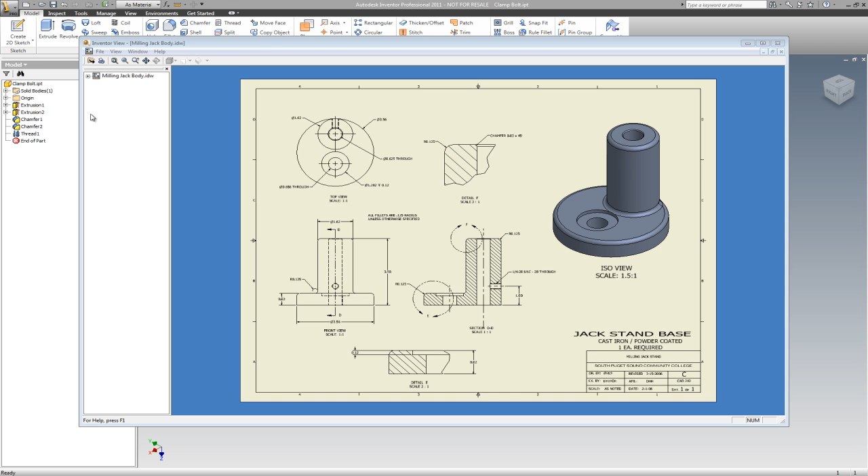Hopefully I have all of my dimensions. Again, as we're going through these, I'm finding that I have not been very diligent with my dimensioning. Here's my last little project that we did, so I'm going to close that out. Go to Projects, confirm that we are in the jack screw assembly. Go to New, Standard. Okay, boy, you can just get whizzing on these, can't you?

So we're going to start with our base. I'm going to go to our center here and find our center, pull that out. I need to go over here. I'm going to just have to drop this out here and come over here. I've got to zoom in my window so I can read my dimensions.

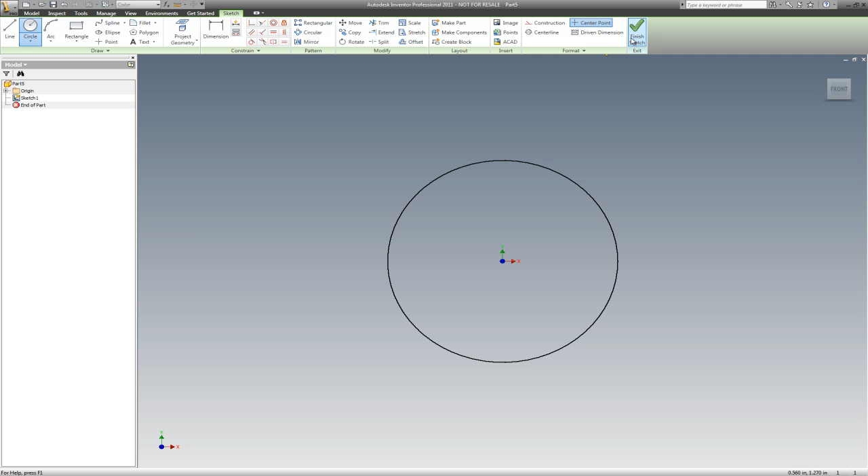Okay, and this dimension is 3.56, and finish sketch, and extrude, and I need to go over here and set a dimension of 0.62.

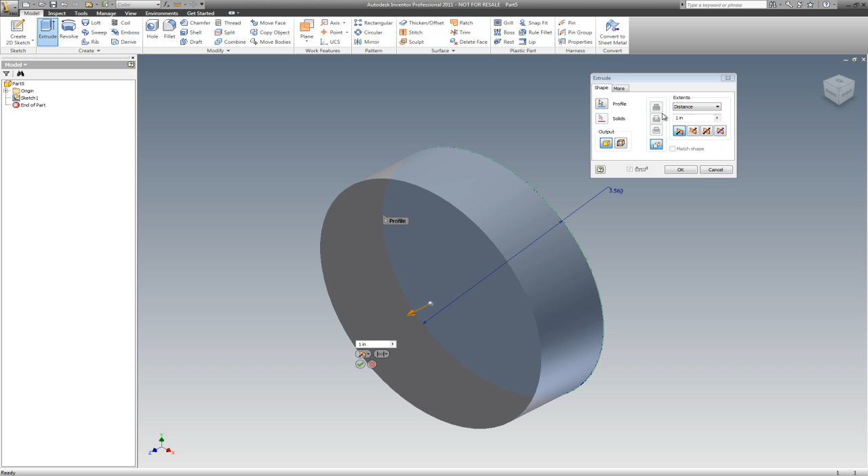I'm going to bring it around front, roll it up, right click, set current view as front, set current view as home, and then I can build off of this.

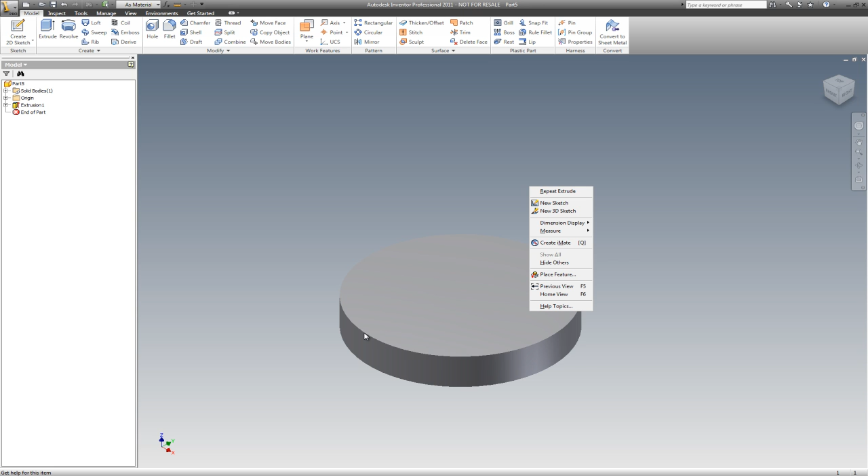We've got several things we need to do with this. I need to do a fillet here, but I don't want to do it until I build the other part, so I'm going to go over here and look and see how this attaches. If we look here, we can see we just created the base and extruded it up. Now we need to create this, and it looks to me like this is tangent with that, so I think that's the next part I will do.

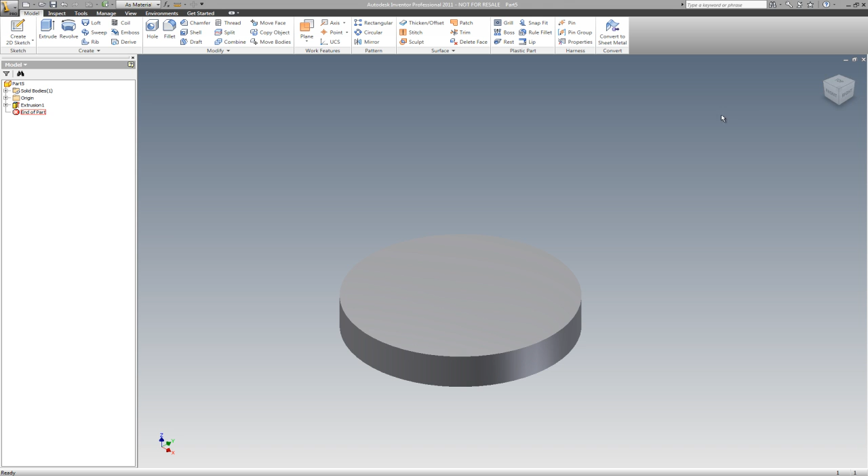So I'm going to go up on top of this. I'll go right click, new sketch, pick that face, draw my circle, just come in here and draw my diameter. My diameter is 1.62, and I'm going to ask it to be tangent from this to that. And the other thing I think I wanted to do is make it perpendicular.

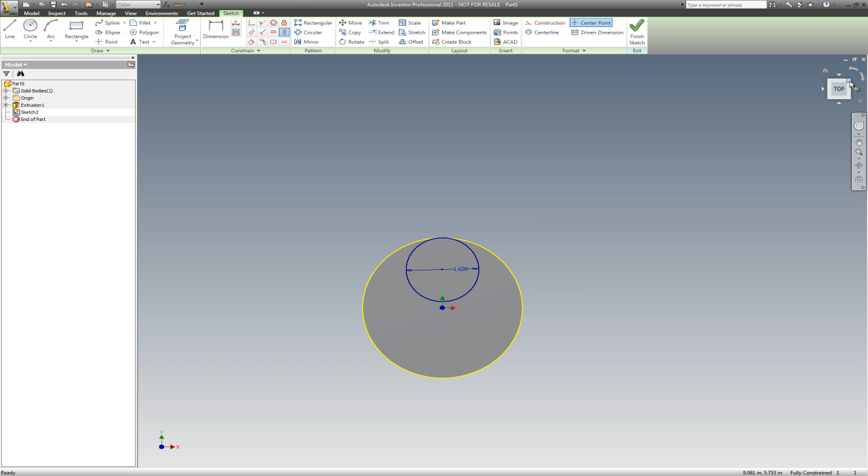Perpendicular from here to here. There we go. So I've made it perpendicular from the center of this circle to the center of that. That's just to help me so it doesn't come back and haunt me later on. Okay, finish sketch, extrude. Let's extrude this out, and it looks like 3.5.

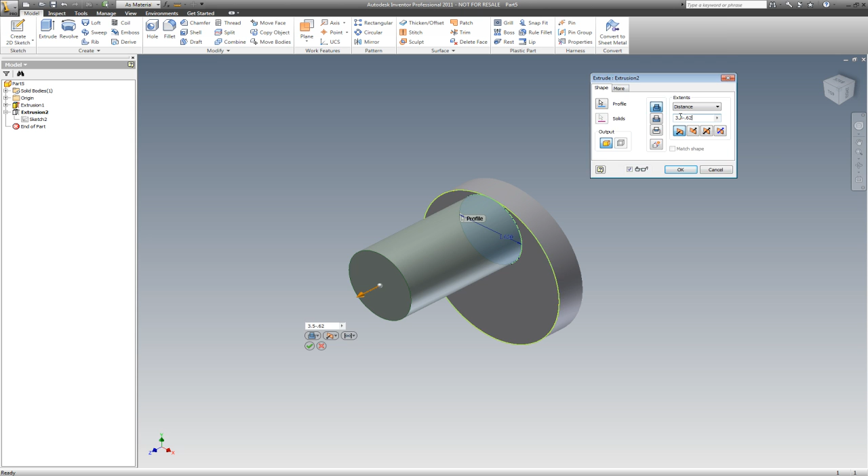3.5. I'm going to go over here and check my drawing to make sure that is correct. Oh, it's 3.5 less, so we need to go edit, go into the extrusion and edit feature, and it's 3.5 inches minus 0.62. There we go, that's a little bit better.

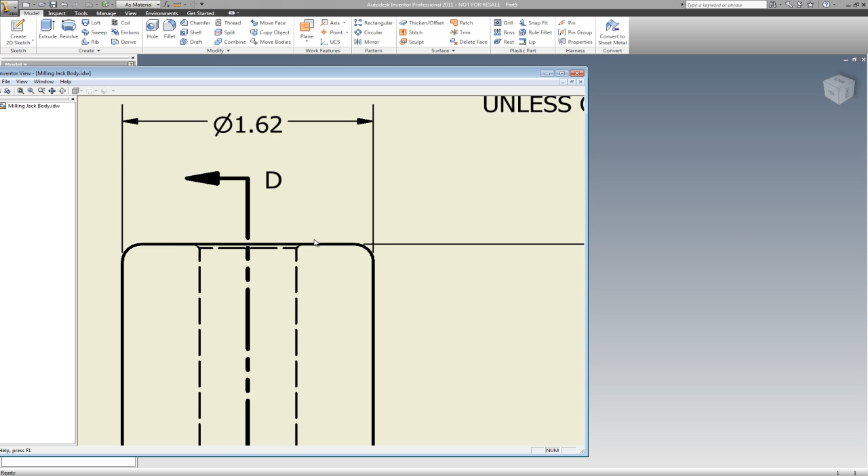Looks like we have a hole going down the center of this. I'm going in and bringing over my other piece so I can double check and make sure everything is what I need to be working on here. Looks like we have a chamfer here. It's interesting, oh, they did that, but you can barely see the line when it's zoomed out because it's a PDF. Okay, so we have a hole going through.

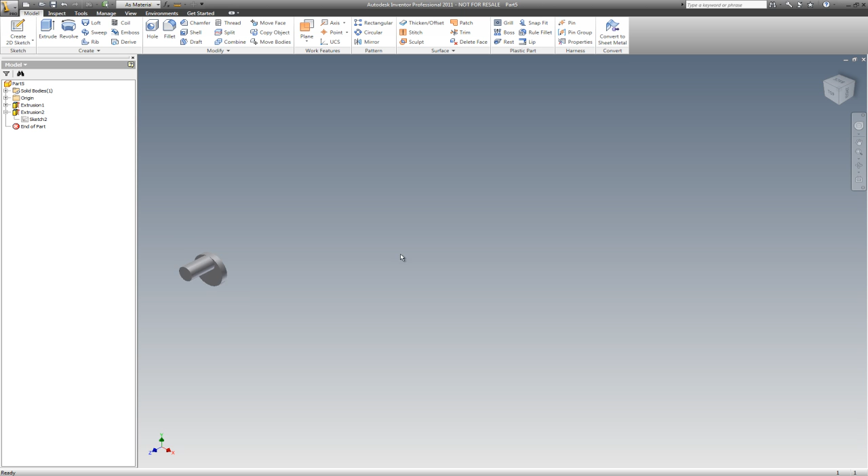Let's put that hole in it. Excuse me while I move this in and out on my other screen. Here we go, we're back to here. Let's go into here, right click, new sketch. We'll pick this face here. We'll come in and do a circle.

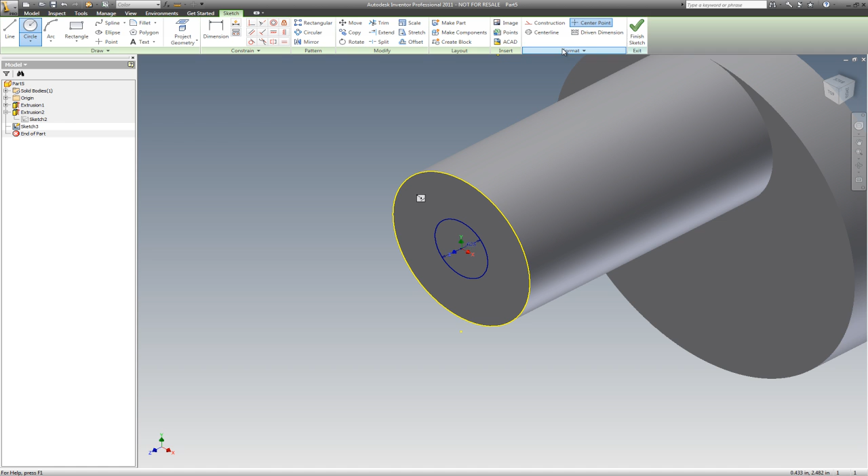And we're going to go find out what size circle that is. That interior hole is 0.625 through, okay? So 0.625, and finish sketch, extrude, pick that, go to cut, go to all, and we should be good.

Let's go around the bottom and see if it's there. Oh, there it is. We like that.

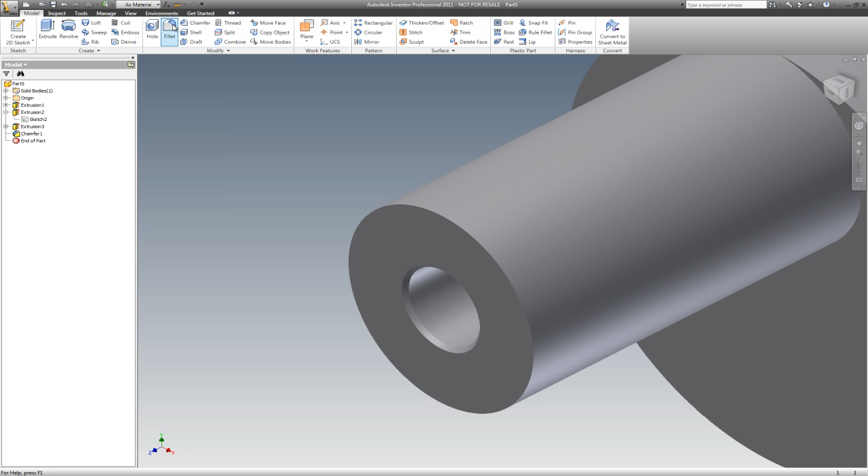Okay, let's go put a chamfer here while we're here. It looks like a chamfer of 0.03. Chamfer, 0.03, check it. Let's do a fillet while we're here, and that's of 0.125, and apply.

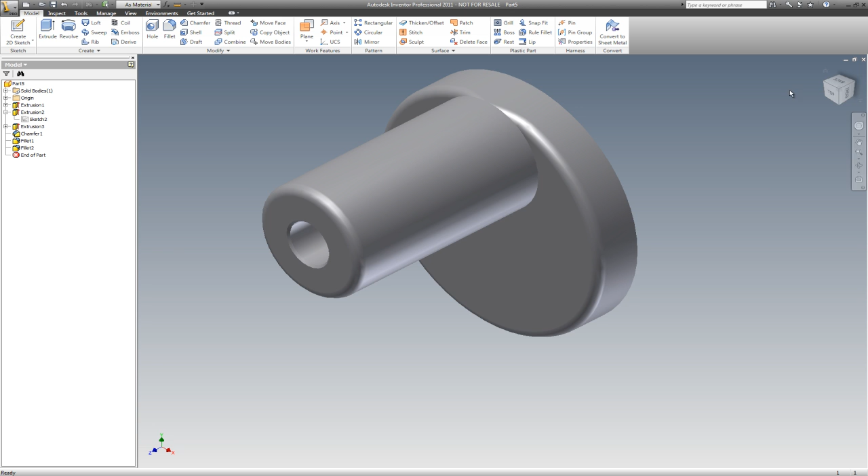And looks like we have another fillet down here. So while we're here, we'll put a fillet around there. Notice how it blends in back here. Let's see how that looks. Yeah, that comes in nice.

We also have a fillet here on the front of this. Let me go over to my other drawing and just verify it - that is also a .125 fillet. So we're going to add that fillet. There we go, that's nicely blended.

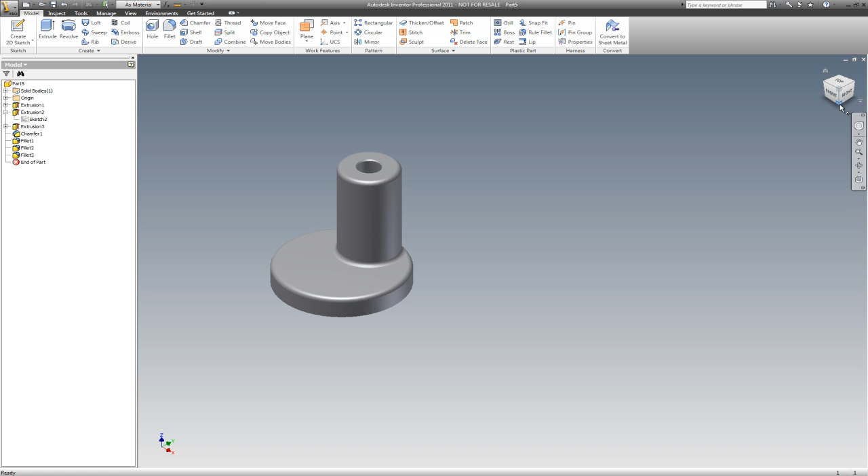We have a hole going through, but I'm going to punch it through from the bottom because I don't have a fillet there, so I don't have to fight to find where I don't have to add projected geometry. So we're going to come in here - what I'm seeing is I don't have a distance. Shame on me. Let's right click, new sketch, pick this face, and come off of the center and go straight up, using that geometry as a constraint.

Looks like we have a hole diameter of .656 through. Okay, 0.656. Oop, it didn't let me do it, so I'll have to give it a dimension. 0.656 - that's a little bit bigger because that bolt, our 5/8-18 bolt we just built, is going to go through there. We're going to go done.

And I'm going to have to come around - I don't have a center point on that, so I'm going to pause here for a second. What I'm looking at is I don't have a center where this is from the center of this object. It's just placed here, and it's not in the center of the piece. So I'm going to have to go find that, and I'll be right back.

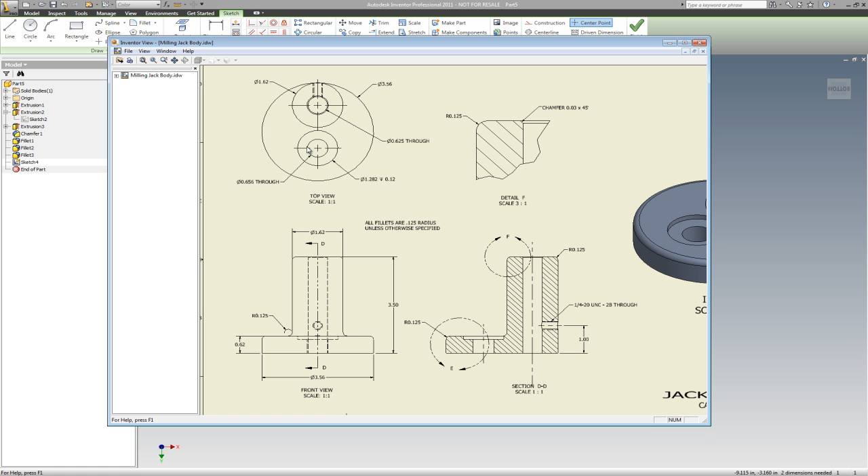As I'm looking, that distance is from the center of the original base - we're 0.59 down for the center of that circle. So I'm going to go back over to my part and create that dimension, from here to here, 0.59. Finish sketch - I'm going to punch that through. Cut, distance, all, okay, and there we go.

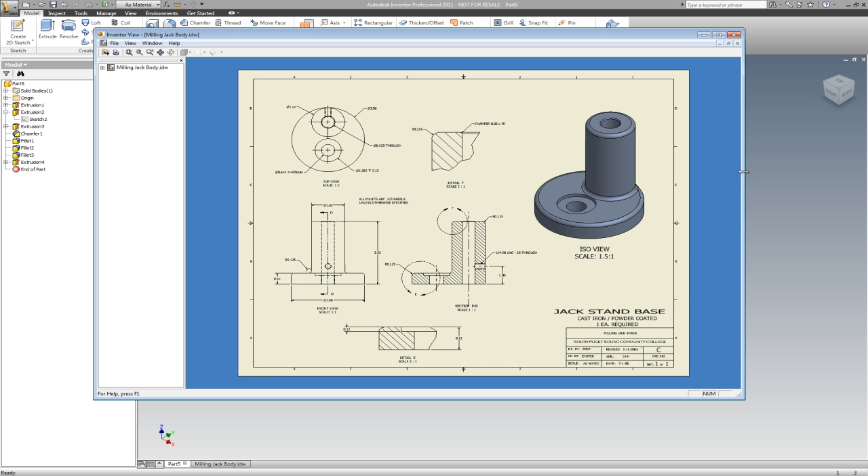Now there's another sketch that we have here - just a moment, let me pull this up and find out what my next dimension is. This dimension here is 0.12 down, and we have a diameter showing as 1.282. So what I'm going to do is start a new sketch on this face.

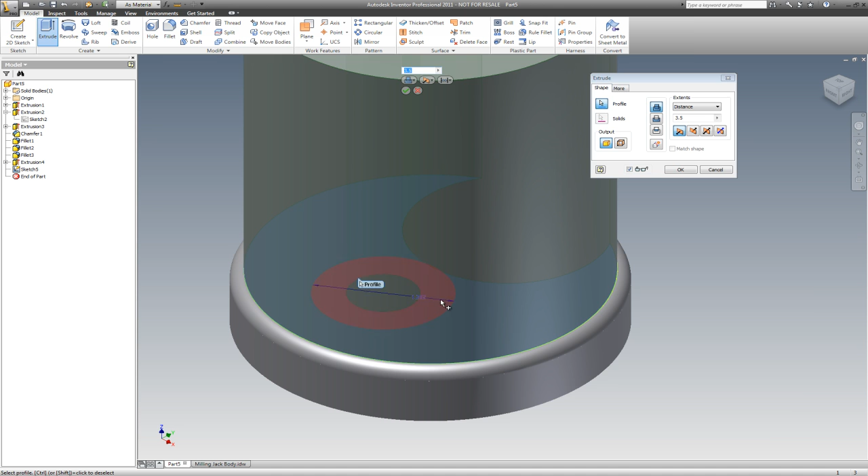1.282 is my diameter. Going to finish, go to extrude, I'm going to pick this. Is it going to not let me pick that profile? Let's see here - extrude. Do you see where it's overlapping here? It's not letting me pick that profile.

So what I'm going to have to do is something we haven't done before - I'm going to cancel out of that. I'm going to have to go back and find this fillet here, which is right there, and delete it. So I just deleted that fillet - it went away. Okay, now I should be able to come over and extrude. Come on, let me extrude here.

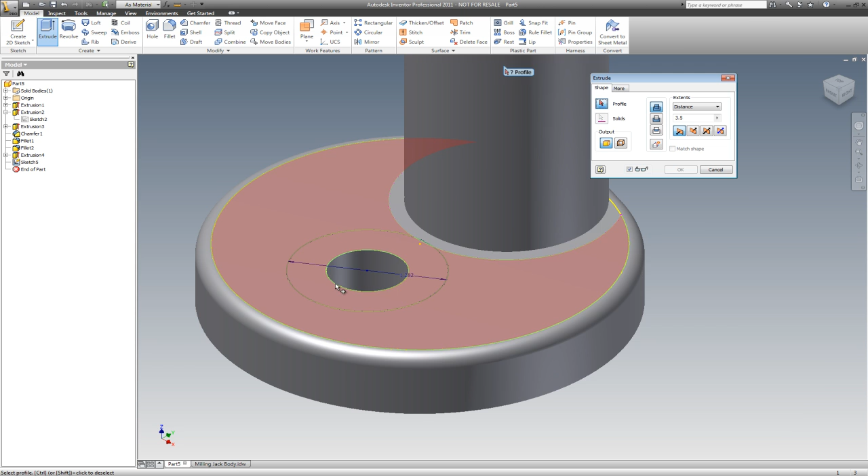And it's not going to let me do it. Extrude, pick - let's see what happens when we go to cut. Nope, it wants to grab all of that. So what do we got going on here? Something's not kosher. I'm going to go into this sketch here.

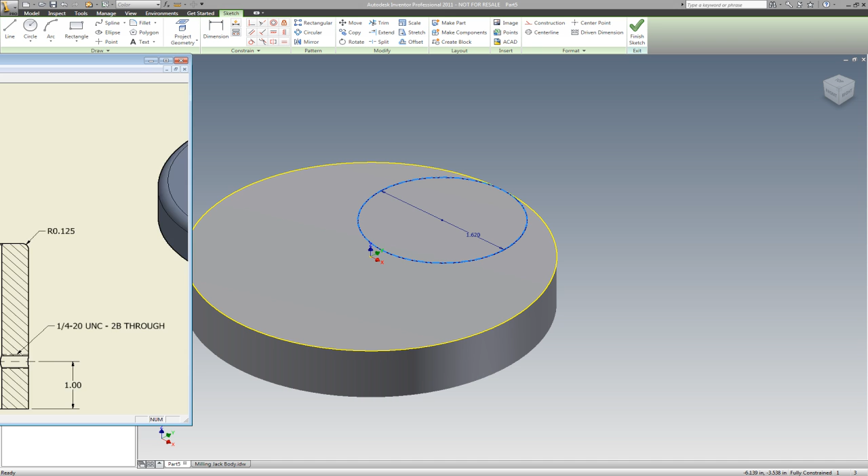This sketch here, edit sketch - we're okay, extrusion is okay. Let's double check the diameter of this sketch here, and that is 1.62. I'm zooming in over here in my other drawing, trying to confirm that - 1.62 is correct. Okay, so we're going to go finish sketch.

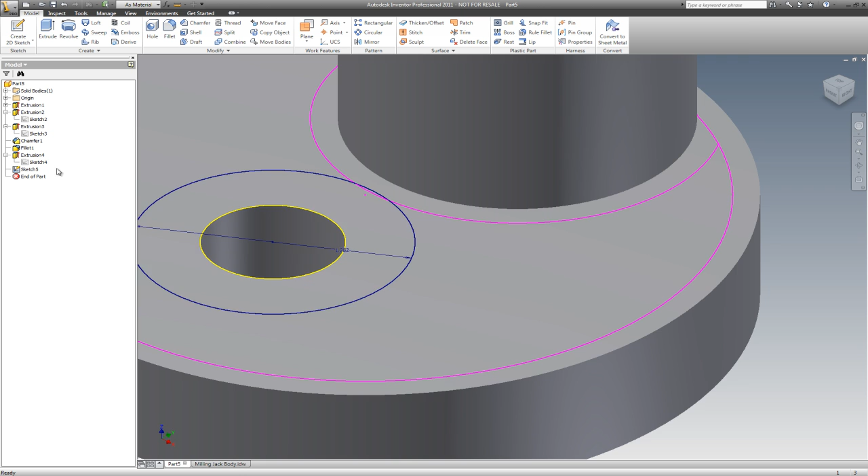And I don't know why I'm having problems right here. I need to get rid of - let's delete that fillet. So I may have to back up here, guys. I'm sorry.

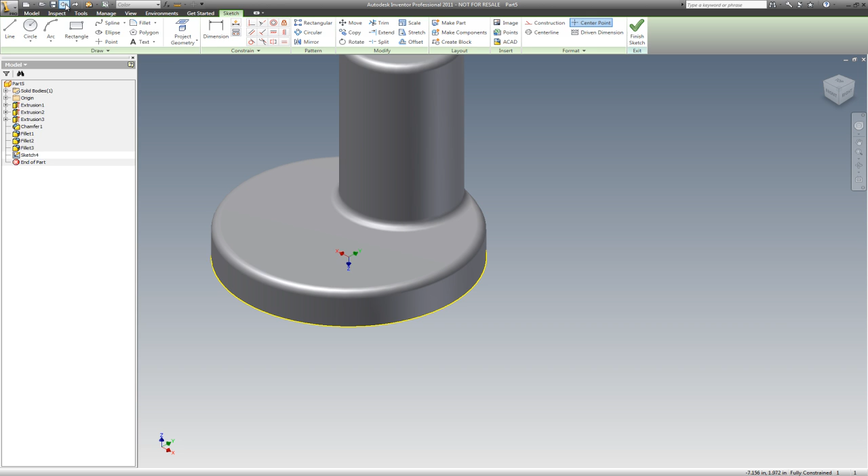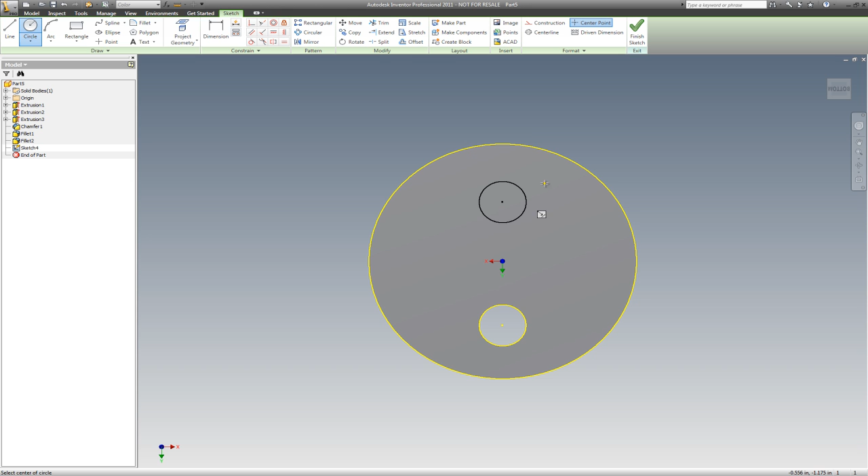Okay, there we go. Now I'm going to go on the bottom, and I'm going to go here - new sketch, pick that face. Sometimes it's just not worth trying to fight it. So pick off here, and come up here - I should have the dimension already there.

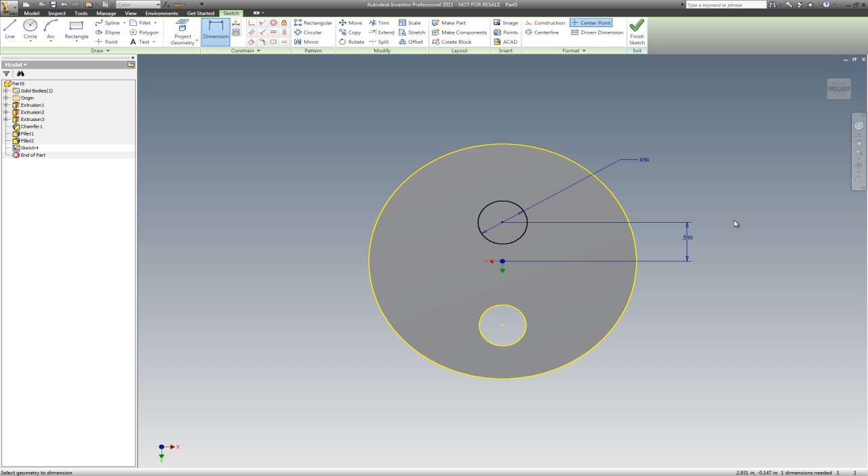And that was 656. There we go. And I should have the dimension from here to here, which we know is 0.59, and that should already be in there. Those dimensions don't go away when you back up, which is really nice. And extrude, and pick, and cut, and OK, and ISO, and then new sketch, face, circle.

Again I'm going to just dimension it because that dimension should already be there in the drop down box, and that was... oh, it's not there. I'm going to go find that. That's 1.282, I believe. I'm going to come over here and double check that just for... 282. I was correct, and it's 0.12 down.

Okay, done. Finish sketch. Extrude. Now we should be able to extrude this down and cut it. And 0.12.

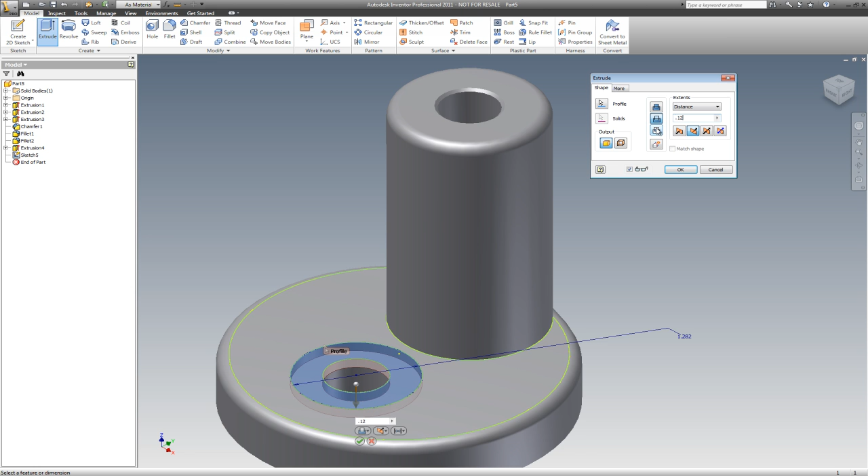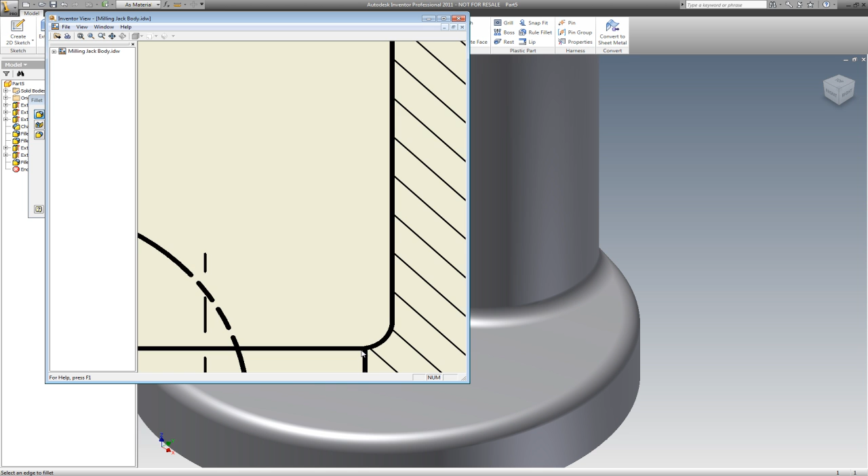There we go. Now let's put some fillets on things. 0.125 fillet here. There we go. Apply. And it blends right into that. You can see in the drawing that it does that also. If we go right into the corner, that fillet's coming right in there and on that edge. And for some reason it wouldn't allow us to do that prior to the rest of the project.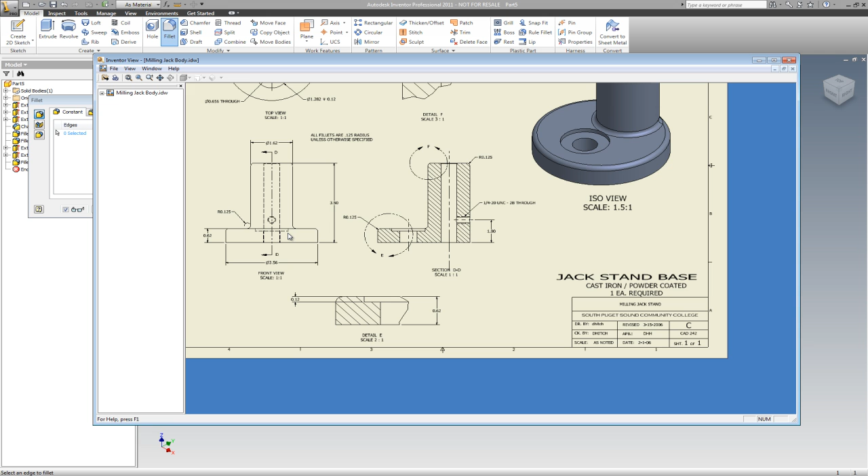I believe, let's take a look if there's any other drawings that we have here that we need to do. We have that radius. Oh, we need a hole. We need a hole through the back side, so we'll come and do that real quick. And that is a quarter 20.

So I'm going to slide that over, and it's a distance of 1 inch up on the center. What I'm going to do then is go in here and find my origin planes, and there's the one I want. I'm going to right click and make that visible. That's on my center point.

I'm going to go up to my plane, pick it, and drag it over here to that just face, so it's right on that face. We've done this before. I'm going to go in here, go to the back, and project a new sketch. Actually, we'll pick that face while we're in the ISO view, and go new sketch, and make sure we pick that correct plane. I don't want to pick that plane by accident. If I want to, I can just go ahead and turn this off now. I don't need this one.

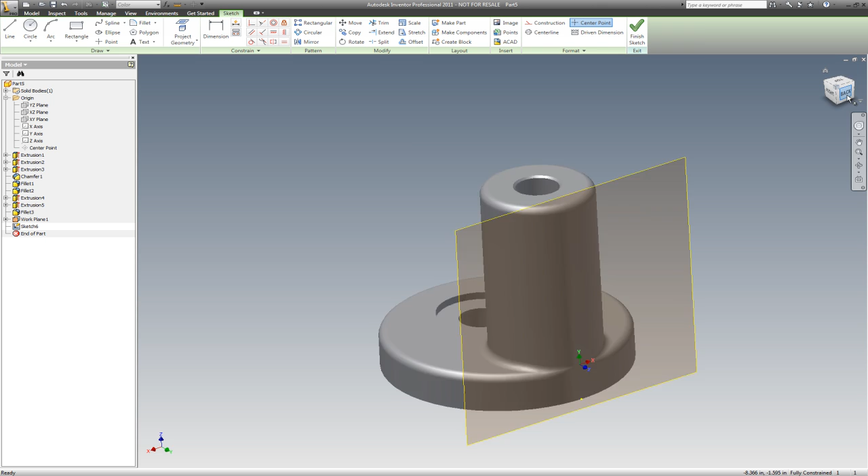Come into the back plane now, and we're going to project some geometry. I'm going to project this piece of geometry here, this piece of geometry there, and it's 1 inch off the base here, so we'll project that geometry.

I'll go in here and draw a circle. I'm going to go off my midpoint. Might as well use the constraint that's there. Pick that and go 0.25. Go for a distance here. And to here. Oops, come on. Distance, diameter. So from that edge there to that center point there, and pull that out. That wants to be 1.

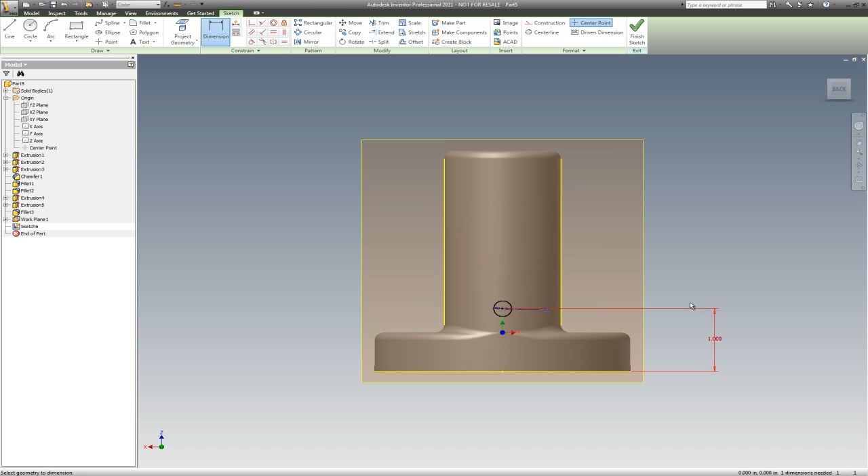And go into ISO. Swing it around here so I can see it. Right click. Done. Finish. Extrude. Cut. And let's go in 0.5. I know that'll go through it.

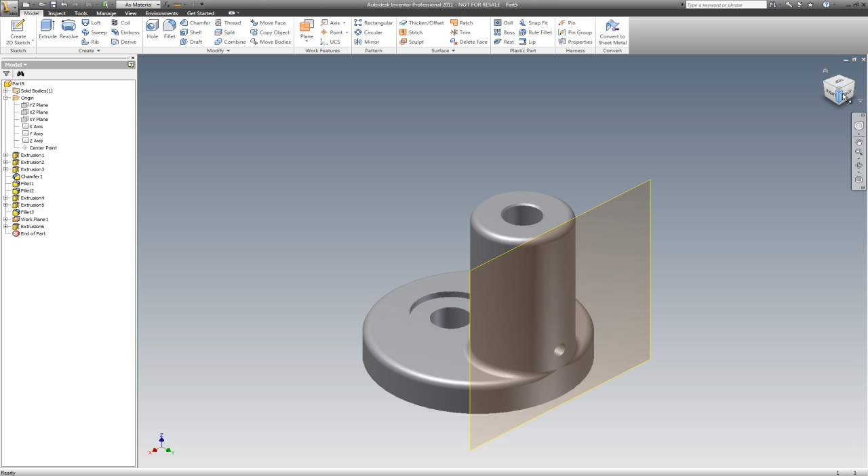And let's look inside here, make sure it's not going through to the other side. Let's go into our view, confirm with our wireframe that it went. Oh, it didn't go in quite far enough, so I need to go in a little farther. So I'm going to go into that extrusion, right click on the extrusion, edit the feature, and let's go in 0.6. And there we went all the way through, which is just perfect.

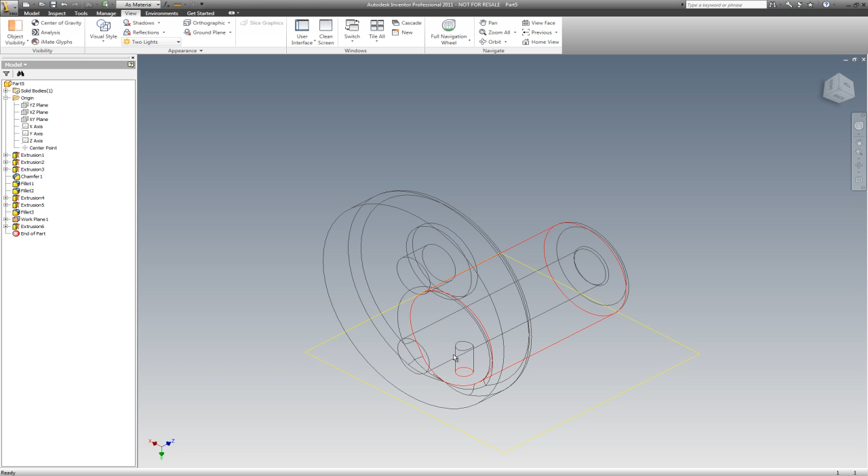Let's go back into our visual styles, go to realistic, go to home, swing that back around, get into our model space. Let's go to thread, pick that internal diameter and specification 0.25, and I believe it's a... 2B through, 2B through, quarter 20, and we are good to go and apply. So that thread is there.

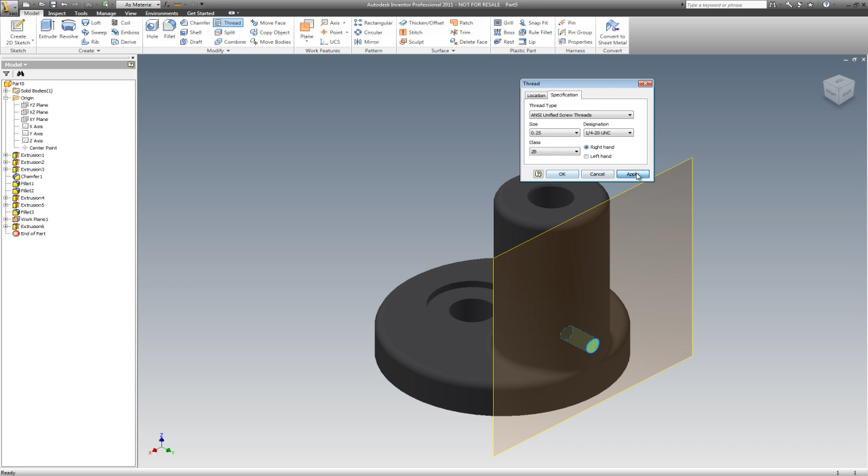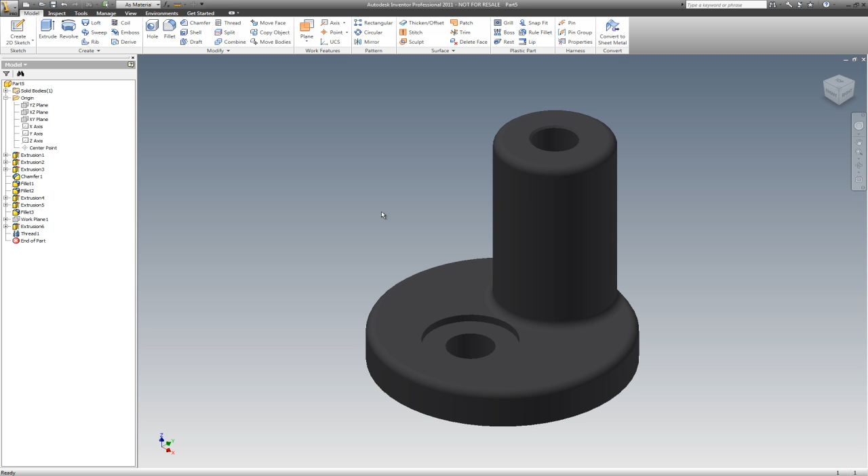And there are no threads in the top here because we have a little piece going there. I'm going to take this, right click it, and turn off my visibility, and my part is done. Notice I haven't been applying any materials to these parts. I'll do that a little bit later. You can do it at this point in time, it'll probably make it easier for you. And we're done in 17 minutes.